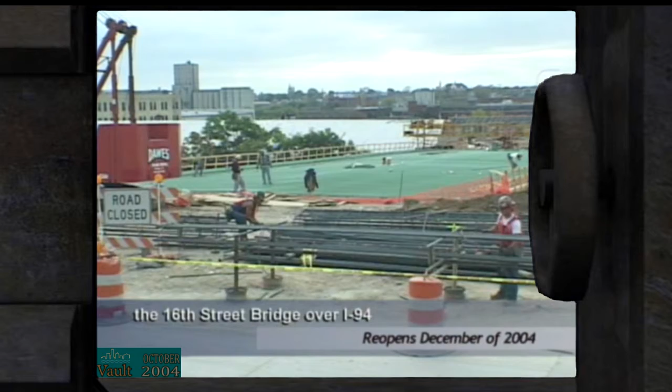Elsewhere, Tory Hill Street, closed last April, reopens in December. The 16th Street Bridge over I-94, being replaced to accommodate more ramp lanes, closed in April; it will reopen in December. The realignment of Clybourn Street to accommodate the 2 ramp lanes to westbound I-94 has been going on since April, and is scheduled to open in November.

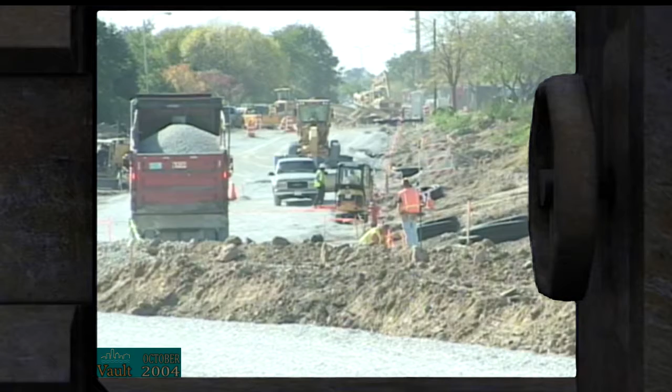The I-43 southbound exit ramp to eastbound Wells Street closes in November; it is also a permanent closing. If you use the Wells Street Bridge over I-43, start thinking of alternatives. It will close in November when Clybourn Street opens, as rebuilding of bridges north to Walnut begins. And West Canal Street from Emmber Lane to 6th Street, closed to through traffic in October, will open in December. Those are the major events through January of next year.

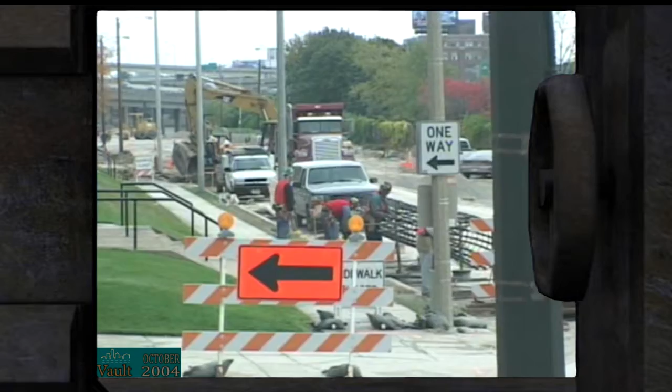Other lane and ramp closures will start next spring and continue for 4 years in and around the Marquette Interchange.

Joining me now to talk more about the challenges facing the Department of Transportation and drivers is Don Reinbold, Team Director for the Marquette Interchange Project. Welcome to our program, first of all. Hi there. Let's ask the why question, and everyone wants to know why the Marquette Interchange, why now?

The biggest reason to replace the Marquette Interchange now is the condition. It's been deteriorating for years, that most people can see by driving through it. We've done a lot of repairs over the years, and it's gotten to the point we just can't repair it any longer. We need to replace it.

It's an expensive project. It definitely is. Federal government's helping out. Yes, the project right now is at $810 million, and the federal government is paying a little bit over 50% of the project.

We have seen in the last couple of years a lot of work around the Marquette Interchange also in preparation for this, right, on other freeway segments. That's correct. We started probably way back in '97 resurfacing each segment of Milwaukee County freeways, and each year we do a different segment, realizing that we had to have all the freeways in tip-top shape when we started the Marquette Interchange so that we're not impacting traffic as it's diverted away from the Marquette Interchange.

We also met with local units of government and let them know what we're doing, when we're going to do it, so they could schedule their construction activities accordingly. The major impact will come starting next year, right? That's correct, in 2005. We've been seeing some lane and ramp closures this year, and that's all preparatory work as well? That's correct. We're doing a little prep work on Clybourn Street, and the reason for that is we needed to relocate 8 utilities. We wanted to get that utility relocation out of the way early, and along with that we're doing the 16th Street Viaduct over I-94, getting that kind of work done ahead of schedule.

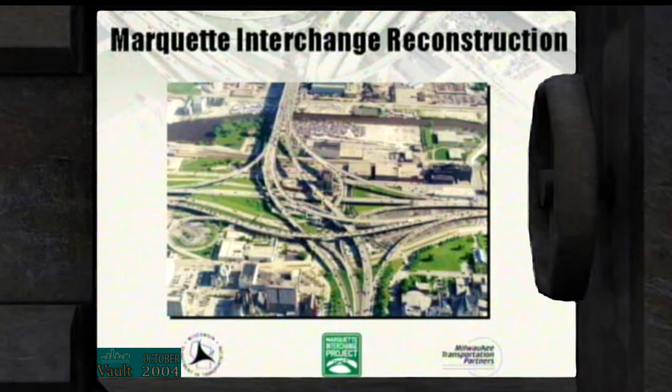The Marquette Interchange is going to be an entirely new type of interchange. We have a budget of $810 million from Governor Doyle. The biggest thing we're doing is moving all the exits to the right side. So you won't be able to exit on the left or enter on the left. On the left, you'll exit on the right and enter on the right.

For example, if you follow the red arrows, if you're going east on I-94 right after 13th Street, you'll exit to go north. That exit is presently on the left. It will now be on the right. It'll be a 2-lane exit, and it actually travels to the lowest level of the interchange, goes underneath Michigan Street, and comes up on the right side of I-43.

In addition, we're making the ramps in the interchange a little flatter so you don't have to slow down as much. The idea isn't that you go through the interchange faster, it's so you don't have to slow down as much when you leave the mainline freeway and don't have to speed up as much when you re-enter the freeway. The other thing we're doing with these ramps is making most of them 2 lanes with shoulder, replacing the 1 lane with no shoulders.

And we're doing all this in almost the same space that's out there. You can see here we're freeing up 4 acres of land for other use, but we are purchasing some additional air rights in the Menomonee Valley.

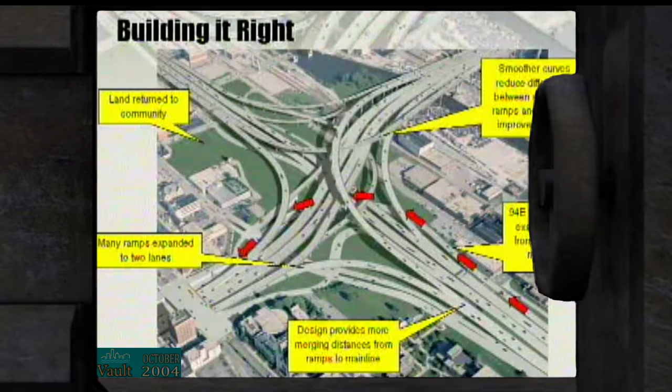If you remember those red arrows, you come right up on the right side of I-43, right about the Kilbourn Tunnel. From the west, you will be able to exit at Jackson Van Buren, Lincoln Memorial Drive, and the new McKinley Boulevard on the north. From the south, there will be a new exit at 10th and Michigan to replace the exit now into the Kilbourn Tunnel. You will be able to get to Plankinton from the south, Jackson Van Buren, Lincoln Memorial Drive, and the new McKinley Boulevard.

From the north, you can enter downtown via McKinley Boulevard. You will not be able to exit at Wells Street, but you will have a new exit at Highland, and then you can proceed down 11th Street to wherever you need to go.

You will be able to exit at Plankinton from the north, Jackson, Van Buren, and Lincoln Memorial Drive. Now the outbound direction, to go north, you can get on at Lincoln Memorial Drive, Jackson Street,

Plankinton to go north, through the existing Kilbourn Tunnel, a new ramp from Highland north, and from McKinley Boulevard north. To go south, you can enter at Lincoln Memorial Drive, Jackson Street, Plankinton.

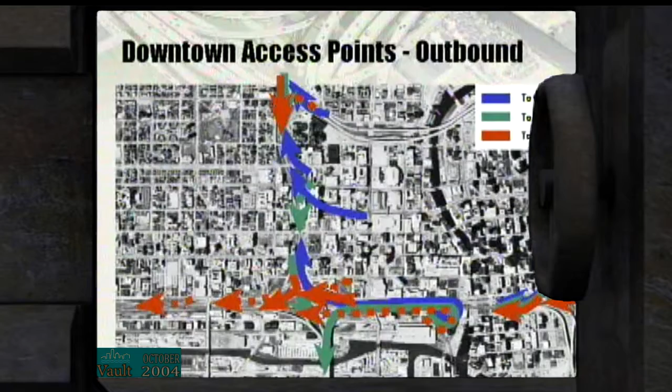So you can see we have just as many exits and entrances now that we did before the interchange, but we needed to move them around a lot to make everything much safer and much more efficient.

I wanted to ask you about the work that is being done around the freeway interchange already. This is a couple of years away from us right now, and the city has actually done some work on city streets in order to help with this project.

That's correct. We've been meeting with the city and the county probably monthly for the last 3 or 4 years, and so they've kind of adjusted their regular improvement program. But in addition to that, we've worked out a traffic mitigation plan with the city, and we're actually hiring the city to do some things on these alternate streets.

We're making changes to traffic signals on, for example, 6th Street. We're eliminating some parking in the peak hour directions. We're retiming signals, and we're adding left turn lanes.

St. Paul is another example where we're going to be doing some things—Clybourn, St. Paul, Water Street—a lot of activity on streets directly around the freeway to take some of that traffic off. Yeah, because we know traffic's going to divert, and we want to help that traffic work flow better.

Our project schedule, you can see we completed our preliminary engineering, which included traffic mitigation, community-sensitive design, and our disadvantaged business enterprise planning. We're completing our final engineering.

We did begin some preliminary construction in the spring of 2004, and our major freeway impacts on I-43 will begin in the spring of '05, and that's where we take I-43 down to 2 lanes in each direction, and all this work will be done in the fall of 2008.

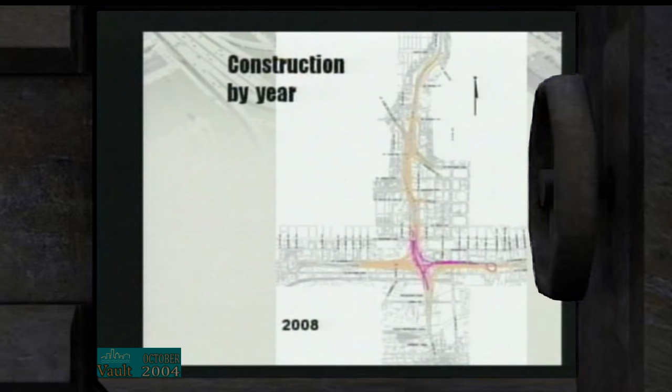2007, we kind of shrink down and primarily working in the core, and we continue that through 2008. This makes a really nice, colorful picture. It looks pretty simple, but I guarantee you this is one tough project.

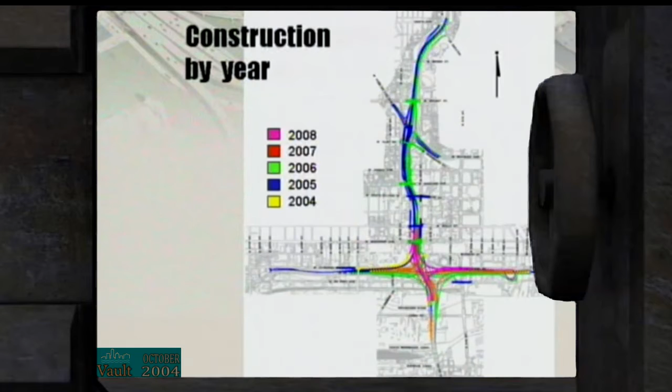There'll be a lot of information flowing. We'll have maps like this. I know this is a little bit hard to read. That'll show what ramps are being closed at different times and what ramps open, and I'll talk about that a little more in a minute.

We are working with the disadvantaged business enterprise community. We want to keep Milwaukee involved in this project. Milwaukee is a very diverse community. We wanted to make sure they're involved.

So the department increased the money that they're putting into our capacity building of the DBE industry, and we also increased the money into our program to develop people's skills so they can get entry-level jobs. So this has been going on, and some graduates from this labor training have already been hired in the Marquette Interchange.

We're setting some small contracts, so smaller contractors and DBEs can bid on them. We're also setting higher goals on all of our contracts.

Under community-sensitive design, this is what we're doing to make the freeway look better than it does today. We heard early on that people wanted a better-looking freeway, so we had two different committees working with us, one on the east-west leg and one on the north-south leg, to get ideas on how to make this freeway fit into the community better.

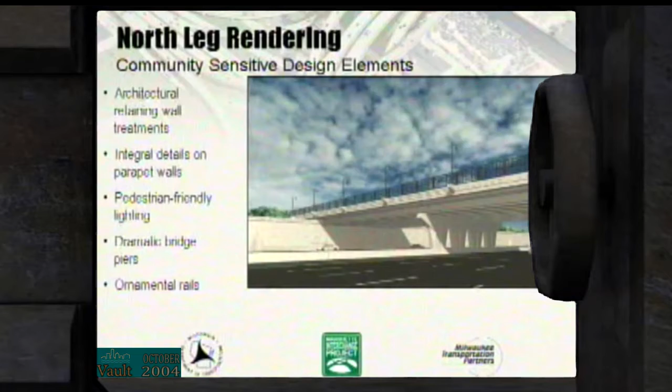You'll notice some big changes here, like nice wrought iron fencing and screening instead of that cyclone fence. The bridge piers also look a lot different, along with changes to the bridge parapets and the street lighting.

When we get up to Walnut Street, in the Black community, we wanted to give recognition to Browns Farm, which was an important stopping point on the Underground Railroad. We hired an artist to work with art students at the school on Walnut Street to develop tiles with Adinkra symbols that will be cast into the bridge parapet. The students are actually making these tiles with the guidance of this artist.

We also hired another artist to make steel Adinkra symbols to be fastened to the railing. A third artist is going to put a mural on the abutments where Fond du Lac Avenue goes under I-43. It won't look exactly like what you see here; it'll be a different type of mural, again depicting scenes from the Underground Railroad.

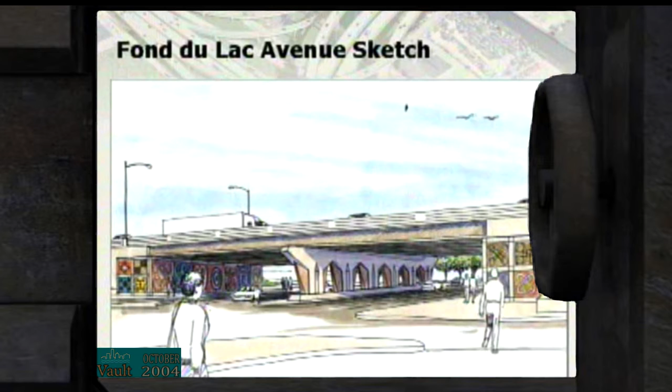Here you can get a nice view of what the piers underneath the bridges will look like instead of the plain round columns. You can also see images of the murals on the Fond du Lac Avenue Bridge, again depicting scenes from the Underground Railroad.

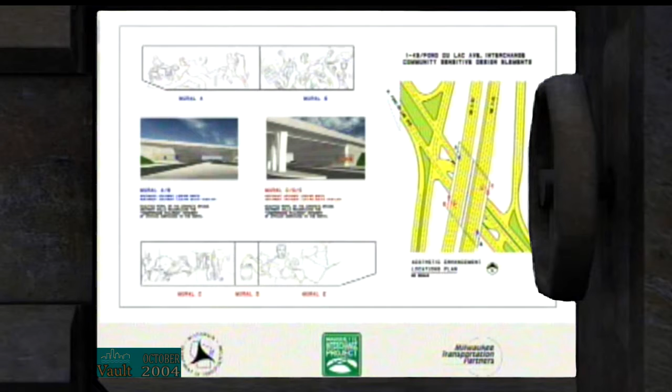The high bridges in the Marquette Interchange are going to have a relief in the center. When the architects came into town and saw the spires and steeples, they wanted to replicate that look in parts of the bridges, which is why you see this definition given to our high columns.

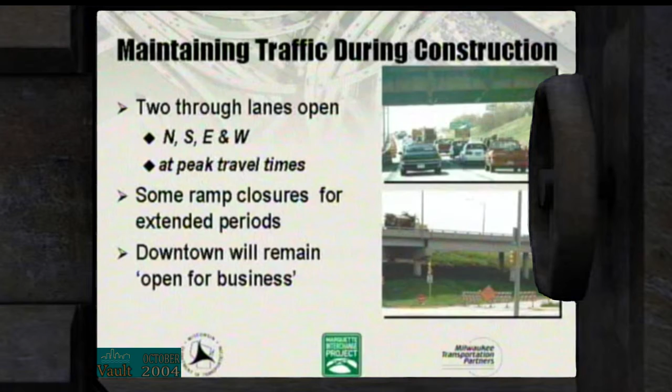We're doing a lot of things for traffic during construction. As mentioned earlier, two lanes will remain open in each direction at all times. In addition, we're keeping two ramps open, and keeping Milwaukee open for business during the entire construction, with two lanes open eastbound, westbound, northbound, and southbound.

We're also keeping open the ramp from the west to the north and from the north to the west. These ramps carry about four times the traffic of the other ramps, so they're very important, and we'll keep them open using temporary bridges to keep that traffic moving.

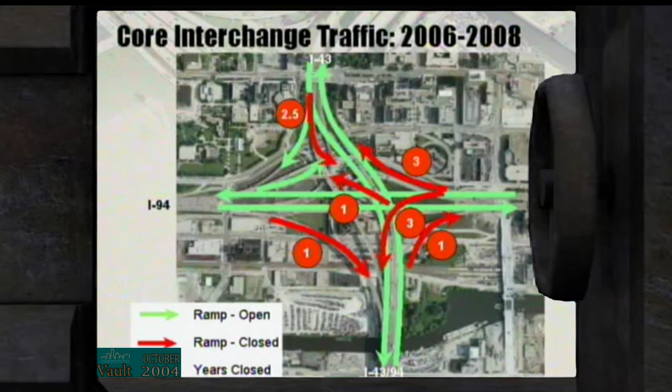All the other ramps in the interchange will close for different periods of time, ranging from one year to three years. The people using those ramps are the ones we really need to communicate with, to help them find the best way to get downtown and avoid delays, since their ramp will be closed for a period of time. That's what our public outreach is going to do.

We had four committees working on traffic mitigation to look at what we can do to keep Milwaukee open. One committee looks at freeway operations and how to keep the freeway working, one works strictly on public information, and we're working with the bus companies on transit options, as well as with the city on local road options.

In addition, we're going to have an interactive website. It's up and running at mchange.org, where you can get instructions. If you tell it where you're coming from and where you're going, it will draw you a map and give you directions. And if you give us your computer information, when we change access to downtown, we'll send you a message so you can get online, update, and get new directions.

Of course, if you don't have a computer, we also have a hotline where you can call and get the latest up-to-date information.

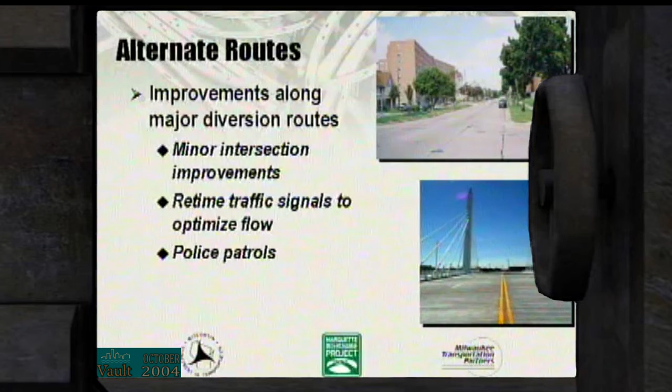We're working with the city on alternate routes. We have 6th Street, which used to carry 50,000 vehicles a day when the freeway ended at North Avenue. If we eliminate parking, we can get a lot of traffic on 6th Street, so you can really avoid the construction by going there. When you're on 6th Street, you really are downtown, and you can get to anywhere you need to go.

We're working with the Milwaukee County Sheriff to clear incidents and keep traffic moving during construction. That's usually a shortened version of a presentation we give to any group that wants us. Either myself or one of the Marquette Interchange team members can go anywhere and answer anybody's questions.

What kind of questions do you normally get when you're out on a presentation?

Some of the questions we get are, why is it taking so long? I don't think the public realizes this is the largest construction project undertaken in Wisconsin, $810 million, and it's a real challenge to get that amount of work done in 4 years. We could shorten it up a little, but then we'd have to close more roadways, and that's more disruptive. What we want to do is keep everything moving as best we can, so Milwaukee stays open for business while this construction is going on.

The other thing people ask is, well, is it going to be better? And it is going to be better. It's going to be a lot safer, a lot more efficient, and it's going to eliminate the bottleneck that exists there today. There are a number of them.

What are the concerns that people have? Is it getting to work on time? Is it getting from point A to point B? What kind of questions or comments do you get along those lines?

I think it gets really basic. People ask, well, I come from here and I go here. How am I going to get there during construction? If we can get people to be that specific, we can help them, and we can usually give them a couple alternate routes from each direction.